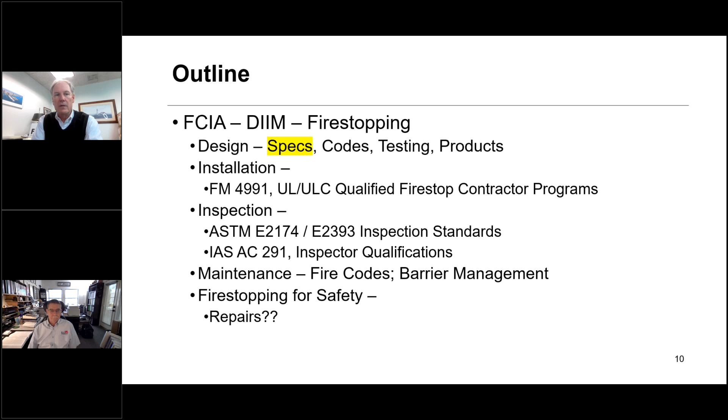So let's get on to today's program about specs. Specifications is what they're really called, but all the rest of us call it, hey, what's in that spec? And it's spelled S-P-E-C, not S-P-E-K. It's part of the proper design, installation, inspection, and maintaining protection of firestopping, which has been the FCIA's rally call since the foundation mission statement development in 1997-98. The DIIM covers a whole bunch of stuff. And what it's to do is make sure that the compartmentation and structural fire resistance that's installed gets installed so that it works at the end of the day when called upon by fire.

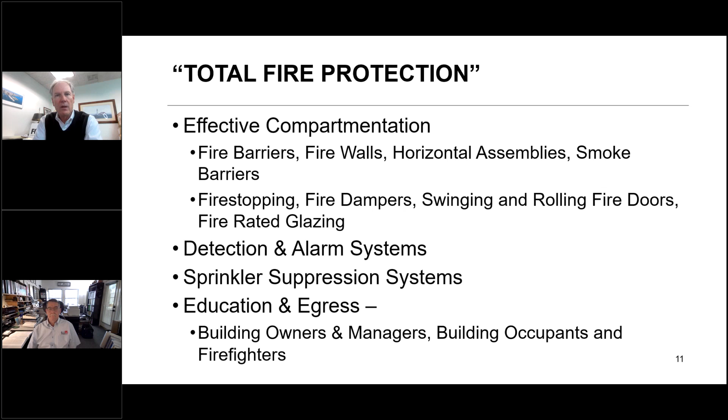We want to make sure that effective compartmentation stays a part of the total fire protection package by building that reliability. The sprinkler system, the alarm system are all common things that people know are in buildings. You look up, you see the sprinkler head, you see the alarm, you watch people go maintain them. But when you start asking people about fire resistance, you get a big blank stare. You're like, that's got to change. That's what the FCIA is about. And many of our manufacturer partners, distributor partners, inspection agency partners, contractor partners are doing their thing to educate as well, building educational tools for that.

So we're going to focus today on the two pieces, the design and the maintain protection specs, codes, and standards. You know, specifications are cool, but they've got to communicate the code requirements through the construction documents, meaning specifications is one part of it, and drawings, to the contractor and the installer definitions.

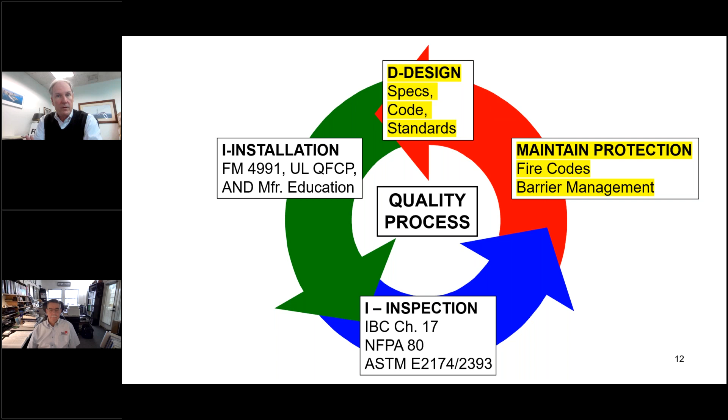Contractor would be the general contractor. Installer would be the company that's installing the Firestop systems. We're going to focus on these two things. We're going to focus heavily on the specifications, though, and if we get to the fire codes at the back end and have time, we'll spend some time with that.

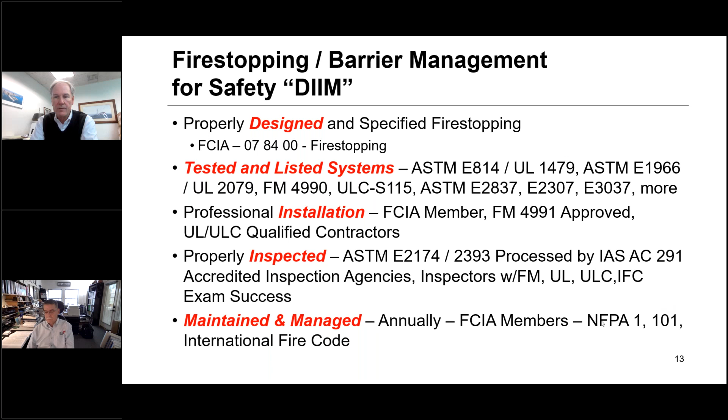Even though we got it in the 2012 version of the International Building Code, it took that long for it to filter its way through specifications and code adoptions to the point where jurisdictions are starting to say, yep, that's something that's normal in our code culture. And of course, maintaining protection for the life cycle of the building. And specifications have to do that.

So let's keep moving. I'll let Ron talk a little bit, but I'll give a short introduction. MasterFormat took a big edit 20 years ago, believe it or not. It seems like yesterday. A guy named Dennis Hall with a MasterFormat task team assembled to go from 5 digits to 6 digits and really brought a lot of interesting things to the MasterFormat list of titles and numbers. Ron, I'll let you hop in and talk a bit about that.

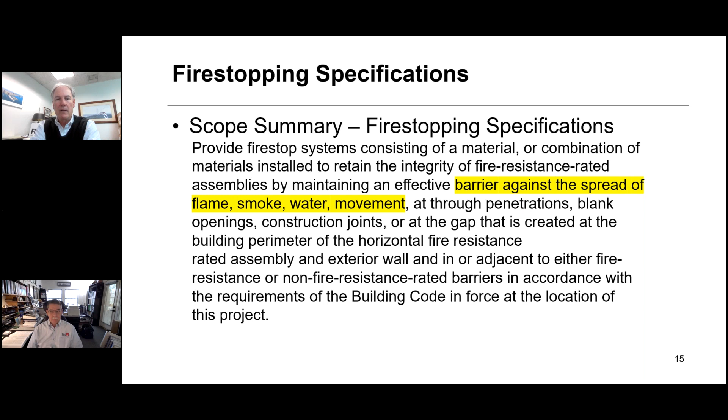Also watch out when you come back to this section where it talks about protecting against fire resistance and penetrations. A lot of the scopes will say seal. And you're like, okay, seal. Seal against what? Water, chemicals, fire, smoke, what? Sealing is really a very broad word and ought to be used very carefully in the specification world.

Really, what we've been asking the fire marshals to do when they walk in an existing building is say to people, protect that penetration, the breach in the fire resistance rated assembly, protect that breach with a fire stop system. And people go, what? You know, when you say seal, guess what you're going to get? Well, gypsum wallboard compound, sealant, latex sealant. Yeah, it looks like it'll protect against fire. It's got a little UL label on it and all that kind of stuff.

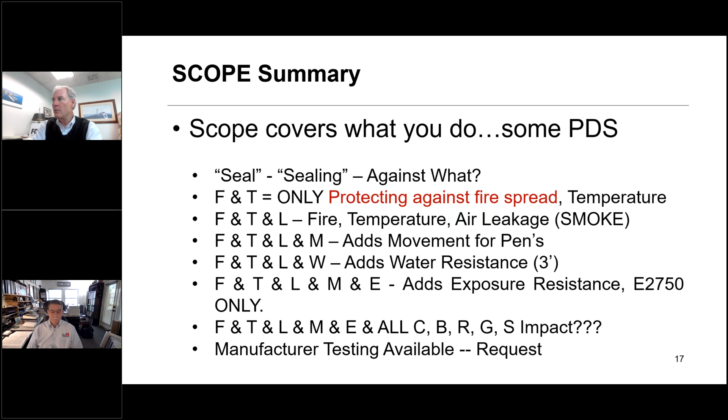Communication is a huge thing, and communicating with the correct words that say protect against fire spread, temperature resistance, air leakage / smoke, water resistance, M for movement, exposure to various chemicals, etc. That's ASTM E2750, a standard that was developed probably 15 years ago that covers salt spray and some temperature differentials, not everything, but specifications really need to communicate clearly what the resistances are that these firestop systems are to resist, in addition to the basic fire, temperature, air leakage, movement, water, then chemical, biological, radiation resistance. Moving on.

Ron, this is where we start jumping into the numbering system. So if you want to jump in here and talk about the numbers that you would find in MasterFormat for fireproofing, or fire stopping, have at it. Okay, primarily what you'll find is in section 078400, which is your fire protection section, and this is what we call a level 2 number, 0784. The first pair is level 1, second pair is level 2, and third pair is level 3. Sometimes you'll see a level 4, which is separated by a decimal point.

But in 0784, that's where you find all your fire protection requirements, all your penetrations, joint conditions, and perimeter fire containment, where you've got conditions of joints between curtain wall assemblies and a floor assembly that comes in. You got to fill that gap between the curtain wall that allows that curtain wall to flex back and forth, but still maintain the seal between the individual floor levels. The focus here is one discipline.

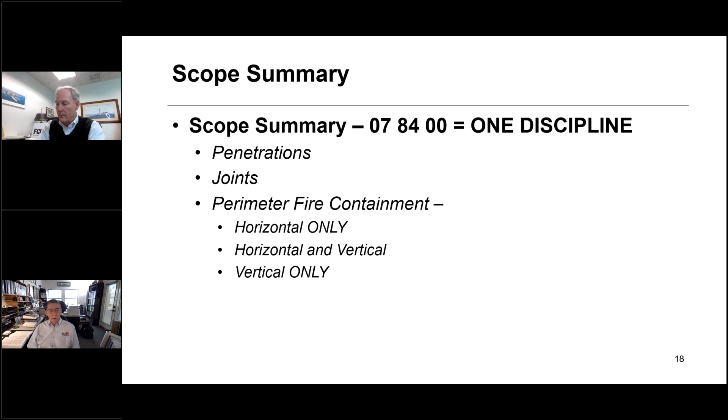Let the electrical and plumbing and mechanical engineers deal with their system specifically, and mechanical engineers will deal with the fire dampers, but the seals and the joints around any penetrating items should be addressed in Division 07 in this particular level 2 category. And also what you want to do is specify that it's all done by one installer as well. To have it done by multiple installers, like the mechanical contractor comes in and putties their joints, and the electrical contractor comes in and putties their joints, you're going to get a variety of quality in the installations and probably none of it good. So you want to have a good qualified installer, which we'll talk about later on. So I'll turn it back to you, Bill.

Let's let you cover some of the other more detailed, looks like level 3 specifications. Go ahead. So this gets into the list of potential sections that you'll see in Division 07 under the 078400 level 2 number.

078413 gets into penetration fire stopping. This is probably the section that you see most, although it does have those level 4 numbers down below. You may see some of these sections specifically if the specifier wants to get that detailed, but generally you don't have enough of those to warrant an individual section for these types of installations, and everything is usually specified in the 078413.

078443 gets specifically into joint fire stopping. Those are the joints between wall to wall, head of wall, bottom of wall, floor to floor. And again, this gets into the specific requirements that focus primarily on fire stopping. And as we'll get into a little bit later, there are some joints out there that are focused more on movement, with fire being somewhat of a secondary consideration, even though it is primary, it's a requirement.

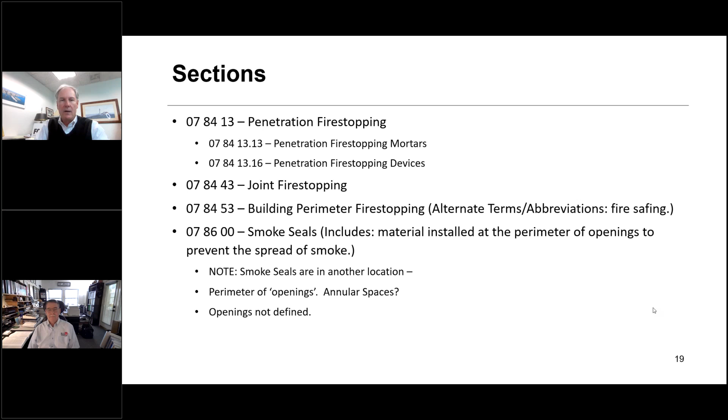And we've been trying to work with the door industry and the glazing industry to talk about the fact that their assemblies protect the breach, a big one, in that fire resistance rated assembly, because they call themselves the openings industry in a lot of ways. Kind of interesting how terminology works depending on where you are and what level you're at, whether you're contracting or at the specifier level, general contractor, and understanding the definitions really is a big deal when you think about it in industry.

Moving forward, a couple other places where fire stopping might be found. Ron, feel free to hop in and talk a little bit about these, whatever you want to do there.

Sure. This is where I was mentioning that you may find fire resistive assemblies in areas other than in that specific 078400 level. For example, concrete expansion and contraction joints, 03-1500 will address specific joints within the concrete assembly, whether that's a slab on grade, which really isn't going to be an issue for fire resistance, but in an elevated slab or vertical construction walls, you'll have expansion and contraction joints in those as well, and those can be breaches to a rated assembly or to a rated structural frame if it's a column or beam.

One that you'll probably find quite frequently is 077129, which is a roof expansion joint, which carries on if you're isolating one segment of the building from another segment of the building for movement capabilities, primarily for wind sway and for seismic, and in some cases thermal as well. You may have a roof expansion in order to complete the full isolation of that building segment from the other building segments. That roof expansion joint may be required to be fire resistance rated.

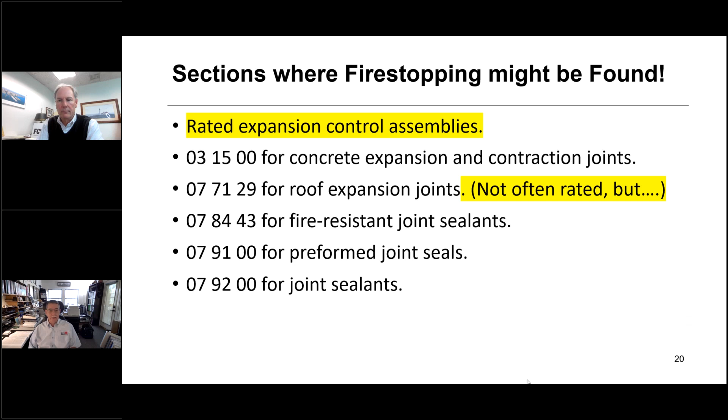Fair enough there, Ron. One thing that we wanted to jump into, and leave your microphone on and we can kind of talk about it together, is the ability that the specification has to speak to the building owner and set up the maintaining protection recipes, if you will, for all passive fire resistance. Sprinkler industry, alarm industry has done a really nice job in the building code, the fire codes, with long, detailed sections about how to maintain protection of sprinkler systems and alarm systems in existing buildings. The fire resistance industry, until the 2018 version of the International Fire Code, had a paragraph about that big, a little tiny thing that said just maintain the protection without much there.

Our friend Rich Walke spent the better part of 8 or 9 months, and then of course 2 code hearings, initial committee action, and then of course the public comment hearings at ICC, working on the fire code, breaking it into disciplines.

You might want to turn your mic off there just for a second, Ron, because I'm getting the feedback again, sorry.

Anyway, what we did was broke the passive fire protection area in the fire code into separate sections. And those separate sections would be fire stopping, structural fire resistance, fire dampers, fire rated doors, fire rated glazing, to be able to cover each individual section. They're relatively small now, but look over the next several years as each industry adds important information about their particular discipline for maintaining protection of existing buildings.

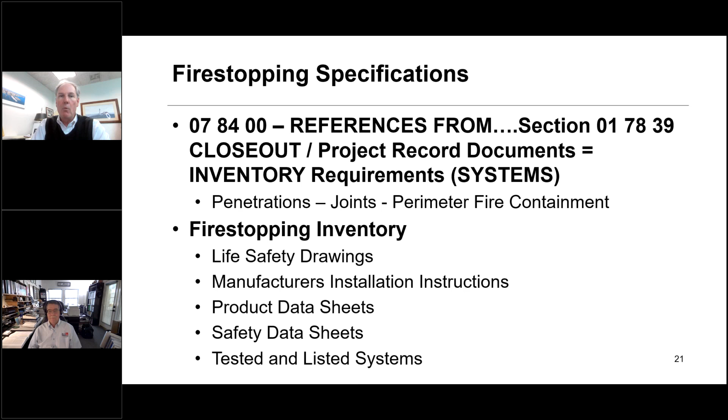So think about that. Some of the references that we see in specifications include several things, and then Ron, you can jump in at any time and talk about them, but we're seeing more specifications call for labeling each individual Firestop assembly. Not required by building code, but seems to be a best practice, and we're seeing more requirements for it.

The FCIA has a recommended professional practice for labeling Firestop assemblies. It tells what that label should have on it, the information, where it should be located, all that kind of thing. We're working at ASTM to build a consensus standard. It will be published by ASTM. Not done yet. Might take us a while. Hopefully have it done before the end of the year, but just not sure.

But it's something that we see. Again, Ron, cut in any time when you want to talk.

I'm seeing more and more of this. The standard specification suites out there, MasterSpec, SpecLink, all include the labeling requirements in their standard specification sections. And as Bill mentioned, it is not a code requirement, but it would help with the inventory.

A lot of people are going to the QR code or the barcode so they can easily scan and get the data quickly. A lot of these handwritten ones, the ink can disappear over time. So the codes will help maintain that in an electronic database. So it's a process that is growing in popularity.

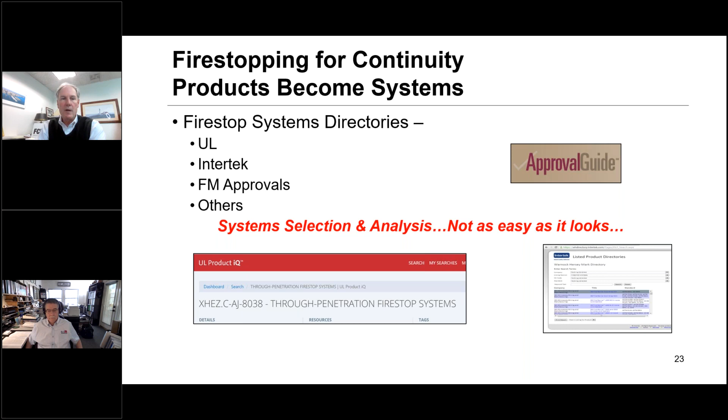And then, of course, find those systems in the directories, UL, Intertek, FM Approvals, other places as well. Engineering judgments, we've talked about this forever at various webinars from the FCIA and others too. That covers when you can't find a system in the UL, FM, or Intertek directory that matches the conditions in the field. So we're looking for an engineering judgment or equivalent fire resistance rated assembly.

How do we prevent using those? Some specifiers will say, well, let's put a representative sheet on the drawings. And maybe at this point, spend a couple of minutes, Ron, talking about the drawings and how they work together with the specifications to communicate what the requirements might look like.

Yeah, drawings, as you know, are one half of your contract documents. So you've got the drawings and specifications, and they're supposed to work together. The drawings typically identify where things go, the quantities and things like that, but they do not address the qualitative requirements. And the qualitative requirements are specified in the project manual, in the specifications.

In most cases where a jurisdiction requires the reproduction of the actual firestopping systems, a lot of architects will reproduce the UL assembly on drawing sheets, which are very proprietary. In other words, they have specific manufacturers identified with those assemblies. If you're dealing with an owner that is a public entity that requires open competition, specifying a single product or a single manufacturer is generally frowned upon, so you have to provide alternative manufacturers.

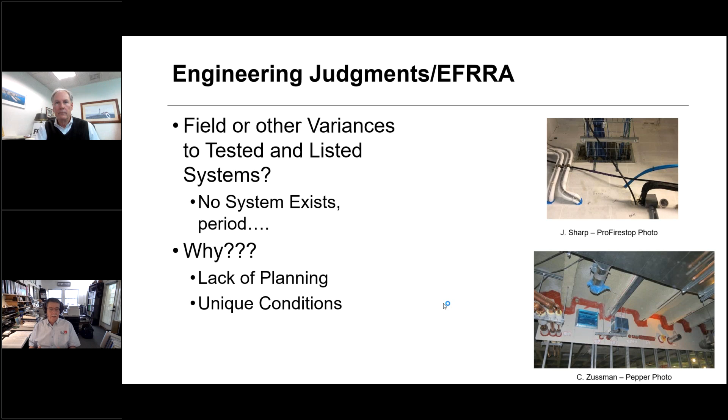And through the submittal process, which will be outlined in Part 1 of the specification, would be a list of all those assemblies that the contractor proposes to use for the project, which may be above and beyond what's actually shown on the drawings, because sometimes the drawings don't show every possible penetration that may occur. So the specifications and the drawings need to be coordinated. If the drawings do show the assembly, the specification should specify what is shown on the drawings and then provide alternatives if alternatives are required.

Cool stuff. While we're there, Ron, I skipped over and got to Part 1. If you want to spend a couple of minutes explaining the three-part sections.

Yeah, so a typical specification section will be outlined in what we call SectionFormat, which is a CSI/CSC document as well. It has three parts. Part 1 is General, Part 2 is Products, and Part 3 is Execution. Part 1 has all the administrative requirements, and if you look at the structure of Part 1, it models the same structure that Division 01 is in. So Part 1 will start off with the summary and go through some of the basic requirements, gets down into what the submittal requirements are, what the qualification requirements are, and some of the conditions that need to be present before work can be installed.

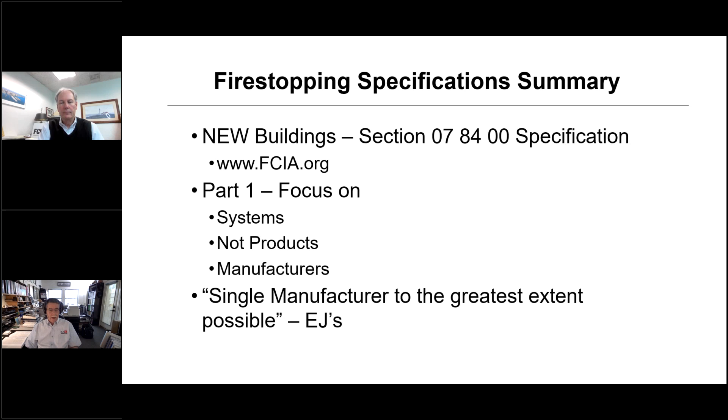Then Part 2 gets into the actual products themselves, and the products will list what the acceptable materials are. In this case, you don't have fabrication requirements. And then in Part 3, we'll get into the actual installation. And so that's the actual execution.

In Part 1, where I mentioned the qualifications, because I'm seeing special inspection here, there are two types of qualifications that may be in the specifications. One would be the installer, and the installer may be required to be certified or accredited through one of these associations. Sometimes the manufacturer of the product may require the accreditation or the certification. And then there are also requirements for special inspectors. Special inspections are required under certain conditions for firestop and fire-resistive joints.

The special inspections typically are conducted by the owner. So in most specification sections, if you do have special inspections, the requirements may not be in there because the owner is handling it separately from the construction contract. However, the contractor needs to know that the project is subject to special inspection. So that requirement would be in there, but there would be no need to identify specifically what the qualifications are for the inspector, because the contractor is not hiring the special inspector.

In those rare occasions where the owner is the contractor and the owner will be hiring the special inspector, you can put in the qualification requirements for the special inspector in that Part 1 area. Anything else there, Bill? No, I think we're all good there.

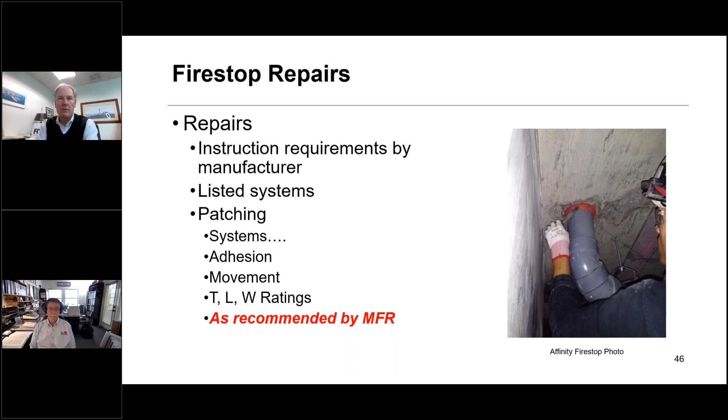So let's do this. We got a whole bunch of questions that have been asked. Let's fast forward our way. We had another program on fire codes that we talked about before, go back in our archives, take a look at it. We'll do another one probably later in the year on fire codes, but we're on specifications today, and let's get over and start covering the questions.

Here's the first question that came in, and it says, I know this might be off subject, but my team and I, owner representative at a hospital, came up with an issue on a smoke barrier wall, not a smoke partition. And it says not fire rated, just smoke. So we've got all kinds of issues going on here definition wise, because a smoke barrier is a defined term in the building code, so is a smoke partition. And the question is, if I have one layer of 5/8 inch gypsum panel, is that sufficient enough to pass as a smoke barrier for the AHJ inspector and or fire marshal? I'll let you have some fun with this one if you want, Ron, and I'll jump in at any time.

Go for it. Well, if it's actually a smoke barrier, it's required to have a 1 hour fire resistance rating, and the assembly itself should comply with that. If you've got 5/8 inch Type X gypsum board taped and finished on both sides, then you essentially have a 1 hour assembly that generally conforms to U419. And so you essentially got a smoke barrier there.